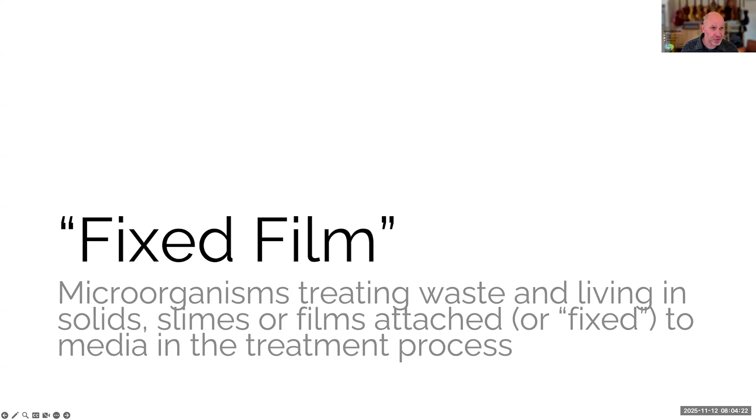Fixed film treatment is actually the oldest form of wastewater treatment that we have. It was basically first recognized around 1890 that aerobic organisms could actually treat wastewater by eating up the carbon in it, the biological oxygen demand. What we're basically doing is microfarming. We're farming bugs. It's a secondary biological treatment process.

So we've got primary separation and settling going on. This is often the next stage, so it's a secondary biological treatment process. Microfarming is one way to think about it, although micro ranching might actually be a little bit more appropriate, because what we're essentially doing is feeding organic material in the wastewater to the microorganisms while providing a home for them on the media. That home gives them access to oxygen from the air, food from the wastewater, and then those microorganisms basically eat that up, grow, and multiply.

...and in the process convert waste in the wastewater into new growth and carbon dioxide. And then, like any herding operation, we have to periodically cull the herd to maintain the growth of the biofilms at a desired level, because if we don't do that, they would essentially just fill up the basin as long as there's food.

There are two basic types of fixed film process that we're going to talk about today. The first is the trickling filter, which you see here. This is an older style one, typically relatively short, but it's designed for removal of biological oxygen demand. Depending on how the setup is done, it could also do nitrification.

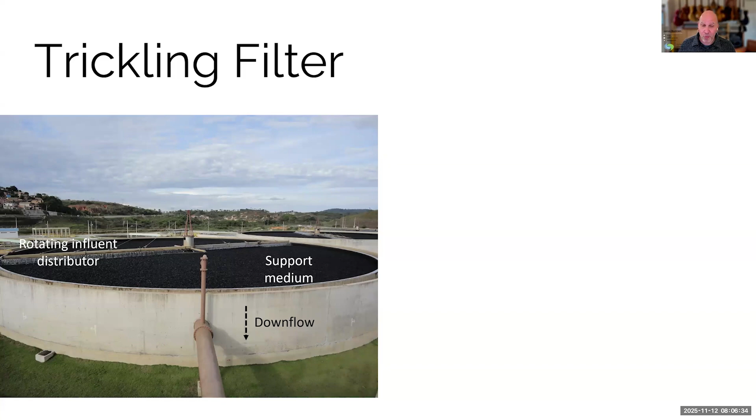The other form of fixed film process is what's called a rotating biological contactor, or RBC for short. It's doing the exact same biological process, and you're basically farming or ranching the exact same kind of microorganisms. It's just that the setup is different.

In a trickling filter, the media is still, it doesn't move. In a rotating biological contactor, the media, instead of being chunks, is these flat plastic plates, and they spin in the trough. Usually the bottom 40% or so is submerged. The microorganisms grow on the discs.

As you can see in this picture, the sort of gray film on there, that's the biofilm. They get exposed alternately to food and air by being rotated in and out of the basin at a very slow rate. Both of these operations usually work at around one rotation per minute, so they're fairly slow. But they both basically use the exact same process, the same bacteria. It's just a slightly different setup.

Trickling filters are the most common versions that we see in the US. So we'll start with those, because if you're going to be asked about these on an exam, you're more likely to be asked a question about a trickling filter than an RBC. But as we'll see, the same principles, the same formulas for determining operations apply to both.

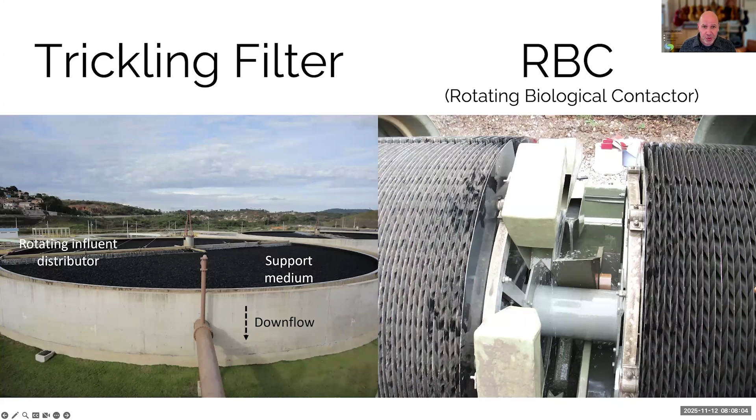So let's start with trickling filters, which are also sometimes referred to as biofilters or biotowers, depending on where you are. I want to point out that trickling filter is kind of a misnomer, because it implies that they're physically filtering the wastewater in the sense of straining materials out like a coffee filter, and that's not what's happening. They are removing unwanted organics from the wastewater, but using metabolic biological processes to do it, not actual physical filtration.

So kind of oddly named, but this was the original wastewater treatment form. It was the most common and widely used form of wastewater treatment in the first half of the 20th century. I found references going back to as early as 1908 in Reading, Pennsylvania. There was a 2 million gallon per day facility that was just a giant trickling filter. So they've been around for a really long time.

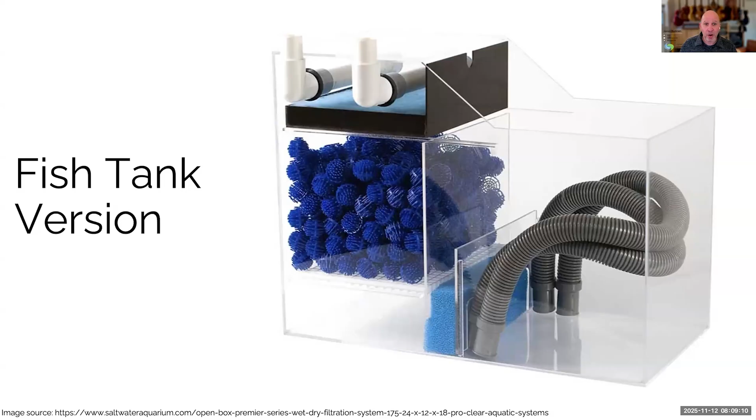They're relatively low maintenance, and you see them in a variety of applications too, not just in wastewater. If you've been to an aquarium or a pet store and looked at their setup, or if you happen to have a saltwater aquarium - I used to have a big 200-gallon one - they have trickling filters in them as well. This is what they look like. It's basically just a small scale version of what's going on at a wastewater treatment plant.

Water in this case is coming in through those white pipes at the top. It's being spread out over that light blue mat, trickles down over those bio balls. They're basically just plastic balls with a lot of surface area that promote air movement and provide a lot of surface area for the microorganisms to grow on, and they treat the water as part of their biological process. If you've been to a fish farm or a koi pond, you might have seen a larger one, something like this.

Exact same principle, just a slightly larger scale. Water's coming in through that pipe that is going across the top. There's media in there, in this case it's rocks, and the water trickles down. The microorganisms eat the BOD in the water and clean it as they go.

So they've been around for a really long time, been in use since the 1900s, and they continue to be a really good secondary treatment option in many cases, primarily because they're really easy to maintain. There's just not a lot to do here.

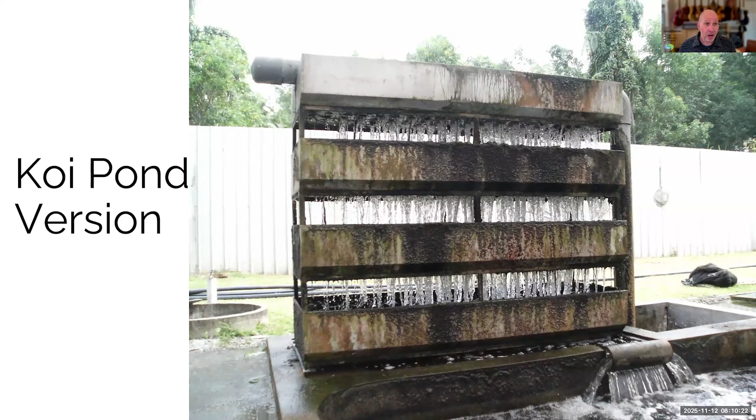As for what's going on inside, it's again a secondary biological process, and the biofilms in there typically have two kinds of bacteria. They've got aerobic bacteria, which use oxygen in the air like we do to breathe. And they have facultative bacteria as well, which can use dissolved oxygen out of the water or out of the air, but can also get oxygen chemically. So they can usually live in either aerobic, anoxic, or anaerobic conditions.

The kind of bacteria that you do not have in these are the anaerobic bacteria, and if those grow in there, they can cause problems. So what you're going to have here is aerobic and facultative bacteria, and they're generally designed just for BOD removal, or BOD removal and nitrification - in other words, turning ammonia into nitrates. Some filters can do both.

We'll look at some examples of how those can get set up. Sometimes you use two different filters, one to do the BOD removal and another to do the nitrification.

Part of the difference between the bacteria is that the bacteria that eat the BOD tend to grow relatively fast. So all things being equal, if there's a lot of BOD available, they'll just outcompete the nitrifying bacteria. So typically what you have happening is the bacteria eating or metabolizing the BOD are at the front half or top of the filter, taking most of the BOD out, so that the nitrifying bacteria have a much lower BOD concentration and can do their thing without being outcompeted. It really kind of depends on loading rates. We'll talk about those in a little bit.

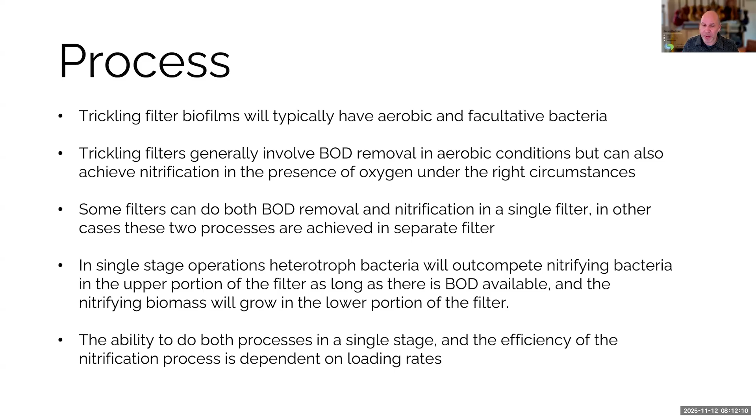Shortly after this was discovered, people started looking at other options, and activated sludge started to come into the fore. So these are sort of contemporaneous. As people did experiments, what they realized was, at least at the time, activated sludge typically had a smaller footprint, gave better effluent quality, and had a lower nuisance factor because things tended to be contained. So you didn't necessarily deal with as many smells and bugs that could happen with these large scale trickling filters, or trickling beds, as they were sometimes known.

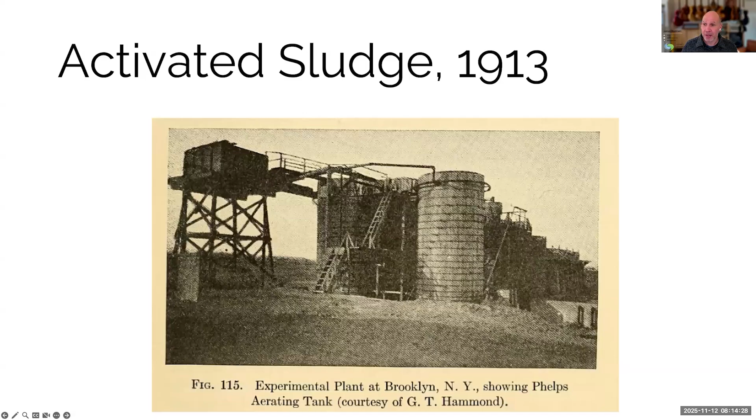And there are some places that actually use both activated sludge and trickling filters to do different things. The main difference between the two kinds of trickling systems that exist are the distribution systems.

The one I showed you from 1913 is basically one of these fixed nozzle distribution systems, where you've got an area or a giant tank, and the nozzles are set up like your sprinkler system. They are where they are, designed to spray an even pattern so you get even hydraulic loading. Downside is that they're kind of hard to maintain, and again, they take up a broad footprint.

More recent versions typically have rotary distribution, looking from the top down here. Instead of having a fixed pattern of pipes and nozzles, you've got a couple of arms that spin around and distribute the wastewater on top of the media that way. It's much more efficient, and it allows you to do things with controlling speed and things like that.

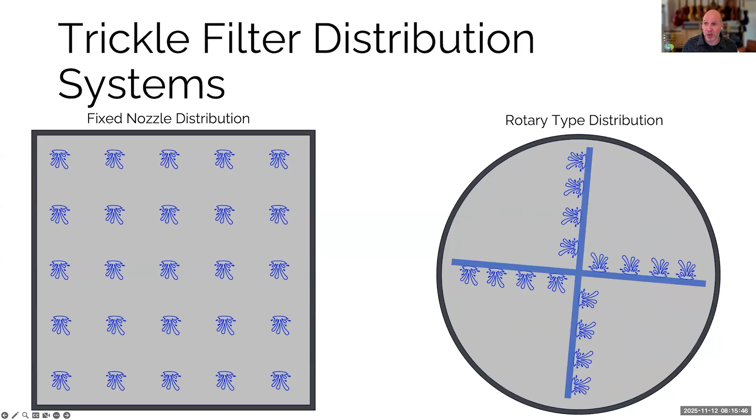So basically, with a fixed nozzle system, you're just relying on the design and placement to ensure even distribution, while with a rotary type, the arms' movement and the size of the orifices or holes in the arms that the effluent comes out of is what ensures the distribution. Two different ways of approaching it. The ones currently built pretty much all have rotary distribution setups. There's a little bit of information for home reading that gives you the basics of the differences.

The nice thing about the rotating arm option is they can work without a motor, because the pressure of the water being pushed through the holes in the arms is often enough to turn the arm itself. But they can also be motorized, so you can control the rotational speed, which, as we'll see, is kind of important. Either way, the goal is uniform loading over the entire tank for optimum efficiency. What you want to avoid is dry spots or dead spots. So again, the rotating arm version is typically what we see and mostly what we're going to cover today.

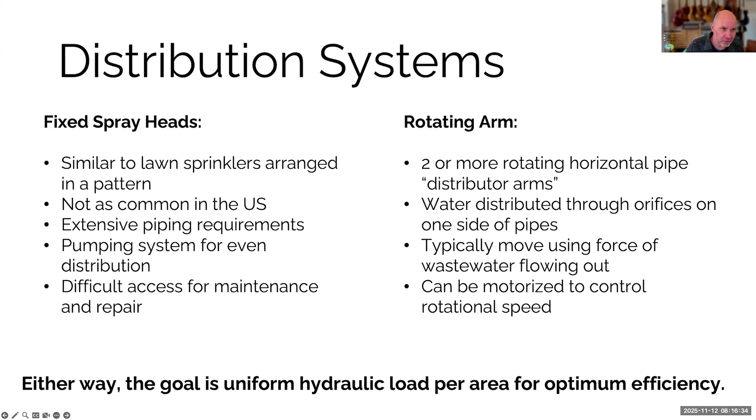Trickling filters have a couple of different setups. Some of the older ones typically look like this. They're relatively short, typically topping out at around 10 feet, because they were designed to have rock or slag as a medium. That's pretty heavy stuff, and once you start stacking loose rock up, you can only go so high without building enormous structures. So typically they'll be no more than about 10 feet high, with the medium inside no more than 5 to 7 feet tall.

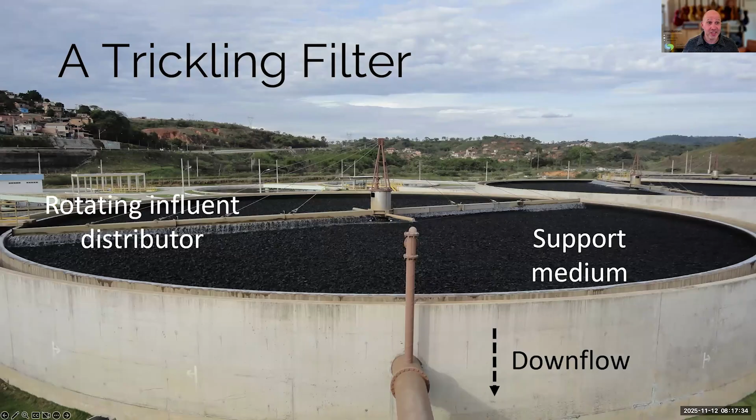This is relatively small — these things can actually be enormous. This is a picture from Stockton where they were building their new treatment plant, and you can see on the left-hand side a really, really big 4-arm trickling filter. If you look at the cars in the middle and on the right-hand side of the picture, it gives you an idea of scale. This thing is probably 40 or 50 feet tall and several hundred feet across, so it's really, really enormous.

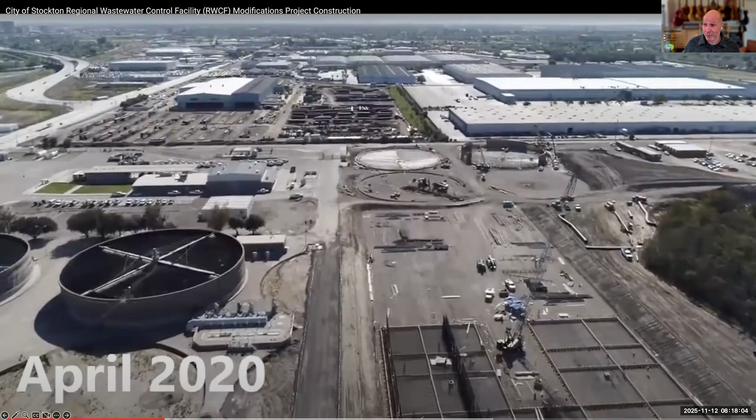And with the lighter plastic media, you can get both wider and taller. That being said, pretty much no matter how you build it, their cross section looks more or less the same — the main difference is the height. You've got a sprinkler arm going around the top, a feed pipe that typically pushes effluent up through the middle, and the filter media sitting in a basin lifted up off the ground with a support. Underneath, you've got a collection system with a drain. So these are the 4 basic components that are basic to all trickling filters.

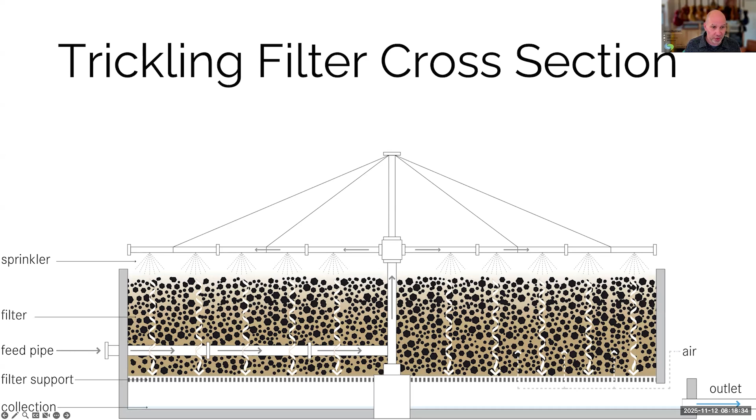You have to have void space for the air to move through, for the biofilm to live, and for the water to trickle down. The downsides of rock are that it's really, really heavy, so it's hard to maintain. If you ever have to move it out of there, it becomes difficult. The void ratio, the amount of open space to closed space, is typically around 35 to 50%, so not a lot of open space. Because of that, it limits the area biofilm can grow on and it also limits the ventilation area.

As I pointed out, in the 50s people started playing around with plastics and came up with plastic media, which really changed the game. Two different kinds of synthetic media were developed. There's the random dump trickle filter media, which is what you saw in that fish example earlier. These are pieces of plastic designed to have lots of surface area and a lot of airspace, and they're typically designed to make the water splash around as it goes down so you get a little more dissolved oxygen.

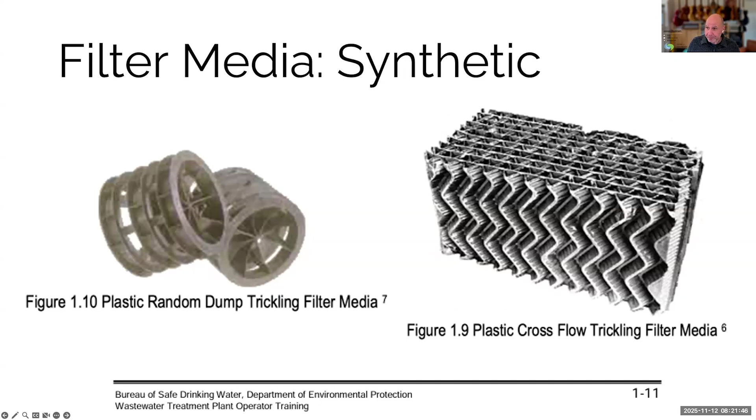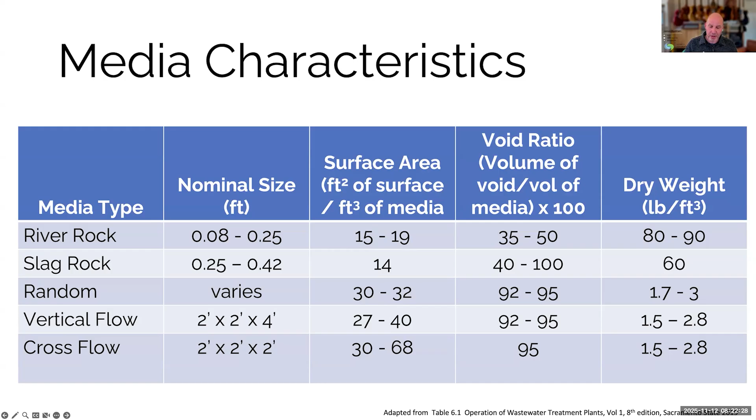You've got a much better void ratio, so it allows more liquid and more air to move through, and it's much lighter, so they're a lot easier to maintain or swap out if necessary.

You can often tell what kind of media is in a system just by looking at it. If it's short, 10 feet or less, it's probably got rock media in it, or was designed for rock media that's been retrofitted with random dump plastic media, which is basically just a bunch of small chunks that look the same. With vertical and cross flow media, it's self-supporting, so you can have very tall structures, 40 feet or more, and they're typically much lighter built. The short ones typically have brick or concrete sides because the rock is heavy and you need strong walls to hold it in. Whereas with the modern, taller designs, because the media is self-supporting, the sides are typically steel, fiberglass, or other relatively lightweight material, since they're basically just there to keep the bugs out, keep the liquid in, and hold everything in place.

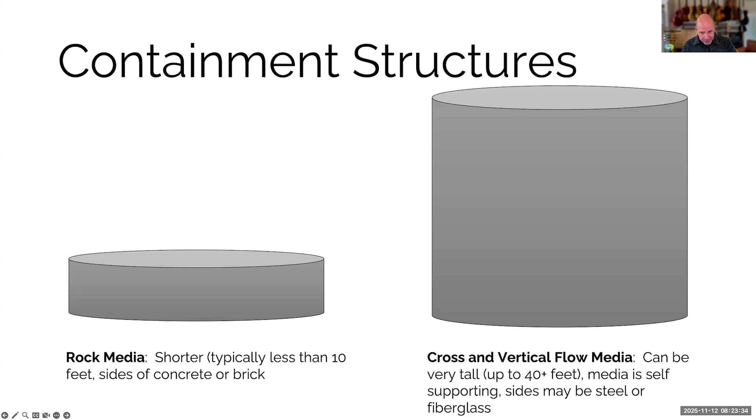They're not really there providing much support. So you've got a distribution system, you've got some kind of media, you've got a containment structure, and then underneath the containment structure, you have a drain where all of the treated water works its way out.

I do want to point out that, particularly in the larger systems, under drains sometimes have to be accessed. They can be very large. Remember, they are confined spaces. It is dangerous to work in them. So you want to make sure that you're following all of your safety SOPs, that you're following OSHA confined space rules, because the last thing you want to do is get hurt or trapped in one of these things while you're doing maintenance.

Now, I mentioned earlier that they have to have a lot of void space so that oxygen can move through the system, because, again, they are mostly aerobic bacteria that we're dealing with here. This is less of an issue closer to the equator, out in the islands, where there aren't really big temperature swings from season to season.

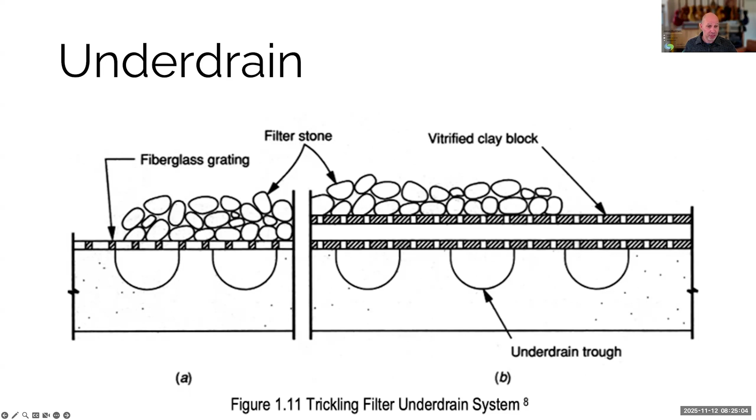But here on the continent and in higher latitudes, where there are big differences between summer and winter temperatures, you get some weird things happening with airflow. In the summer, typically the ambient air temperature is warmer than the effluent, so as air is moving into the tank, it gets cooled down and sinks. So typically in the summer, or in a warm climate, you're going to have top to bottom airflow, because the air is moving the same direction as the water, since it's getting cooler, getting denser, and sinking.

In the winter, we have the exact opposite going on. Typically, the ambient air is colder than the water, so air in the tank gets warmed up by the wastewater that moves through it and it rises. So you get this bottom to top flow pattern.

Now, of course, one of the advantages of these systems is that they can be very, very low tech, and you can just let nature run its course. A lot of systems are either retrofitted, and most of the newer systems are actually built with mechanical ventilation or blowers, so they can control the airflow. So that's what happens if you don't intervene. Obviously, if you've got mechanical air blowers, you can have the air go whatever direction you want, it just uses more energy.

So that's kind of an interesting phenomenon, and something to know, and that's the kind of thing that sometimes shows up on a test. So that's the main components and how they're built, and they're all variations on a theme. The key to running one of these is to understand the design specifications for your particular system.

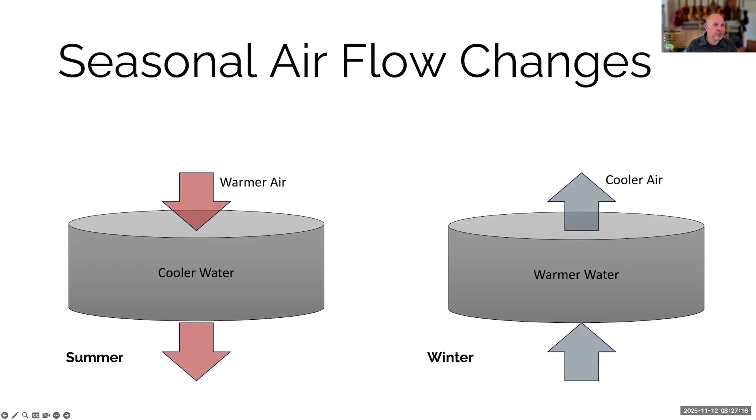So two key things that you have to keep track of are what are called the organic loading rate and the hydraulic loading rate. The first one, organic loading rate, is essentially how much food is moving through the system, and the hydraulic loading rate is how much water is moving through the system.

These are thought of separately, even though the food is in the water, and I'll explain that in just a second. But basically, with the organic loading rate, we're looking at how much organic matter, or BOD, is in the system relative to the media volume. So it's food to volume, pounds of BOD over thousands of cubic feet of media. And the hydraulic loading rate, however, is how much water is moving through the system in relation to the surface area. So one is a volumetric view, and the other is an area view.

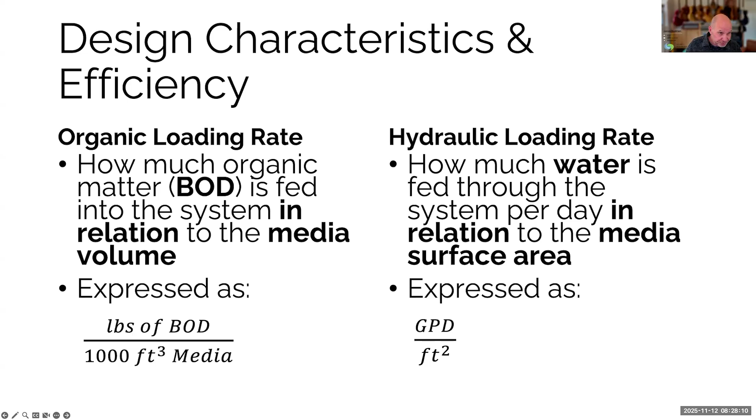So let's talk about the organic loading rate first. I'm going to start with a diagram to show you what you consider and what you don't. This is the typical setup. We've got the wastewater moving from left to right.

We should be taking a sample so that we know what our concentration is. We've got this primary effluent flow working its way through the media. Often there is recirculation flow, as there is in a lot of processes, where we're taking some of the treated water and feeding it back into the system.

So when we are looking at the organic loading rate, you typically ignore the recirculation flow. It does impact how much BOD is in the water, but not very much. So for typical operational calculations, you ignore those, and the only thing you're paying attention to is what's in blue here.

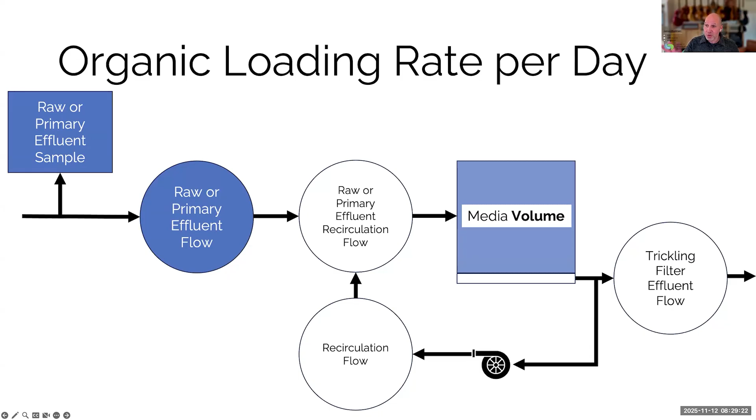The concentration, which you're going to get from your lab sample, the volumetric rate, which you're going to get either from doing some math or from a meter that's telling you how much is flowing through, and then your media volume, which is going to be constant. That's just something you'll figure out using your volume formulas depending on the size of your tank, and typically these are going to be round these days. So those are the three things you're going to consider.

This is basically what the formula looks like. It looks ridiculously complicated because we're using imperial and metric units. So we're using gallons per day, but we're also using kilograms and milligrams, and we have to do some conversion factors here. But it's pretty simple when you think about it.

Basically, it's the flow in gallons per day converted into liters times your BOD concentration, which is what you're going to get from that lab test, and then some conversions to turn kilograms into pounds, and then that over your volume. This is another version you might see where the two conversion factors are pulled together.

So in the top line you have the 3.785 and 2.205. You multiply those together, you get 8.34. So that's your organic loading rate. It's essentially how much food is in the water divided by volume.

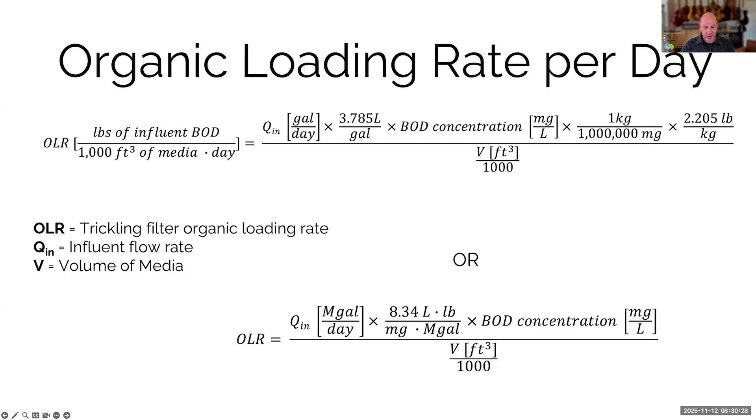The other thing you need to keep track of is the hydraulic loading rate. You need to know how much food they're getting, and you also need to know how much water is going through. The hydraulic loading rate, you actually do have to account for recirculation because recirculation is part of the water that's going through. So you're looking at the media surface area.

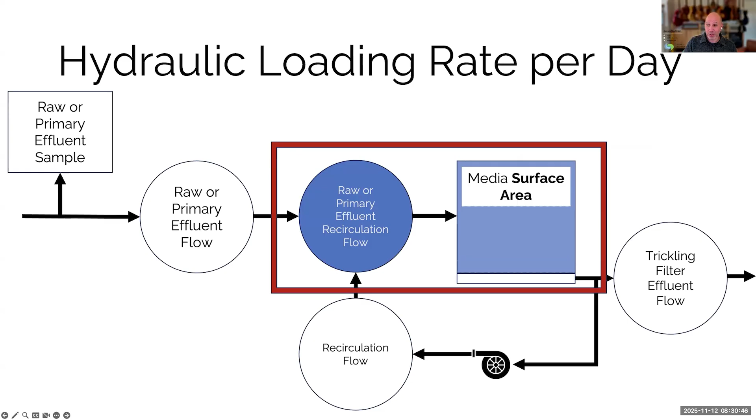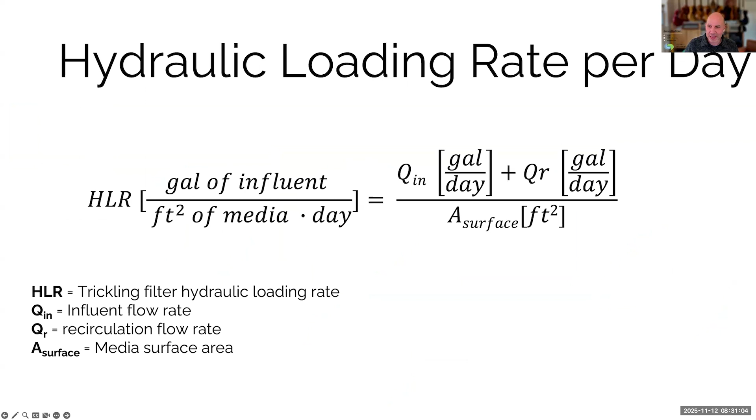You are adding together recirculation flow and your raw or primary effluent flow. It's a simpler calculation. It's basically the flow in gallons per day from your primary, and whatever you're recirculating, divided by the surface area. Pretty straightforward. I'll explain these in a second, what you use these for.

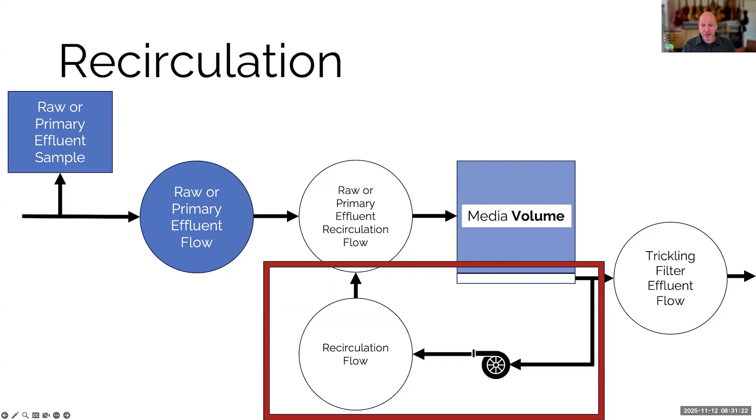Last piece, of course, is the recirculation, keeping track of how much of the treated water you're pushing back through the system. Recirculation is really a key component to operational variability here. It does a lot of things, and what it mainly does is decouple the organic loading from the hydraulic loading.

So the amount of food that's coming in is more or less constant, but by recirculating treated water, you can essentially change the volume of water that's moving through without impacting the amount of food that's moving through very much. You also use it for other operational procedures.

Like I said at the beginning, if you let the biological growth go unchecked, eventually the system would plug up. So you periodically have to rinse it out, which removes some of the biofilm. The recirculation is one of the ways that you do that. You produce hydraulic shear, basically forcing more water through the system to slough off some of those solids.

You can also use it to dilute the wastewater. If you had a random high load of BOD, you could adjust it. You can increase contact time. You can also use it to reseed the filter with microbes, just like you do in an activated sludge process, where some of the activated sludge goes back to the front to reseed the basin and prevent things from drying out.

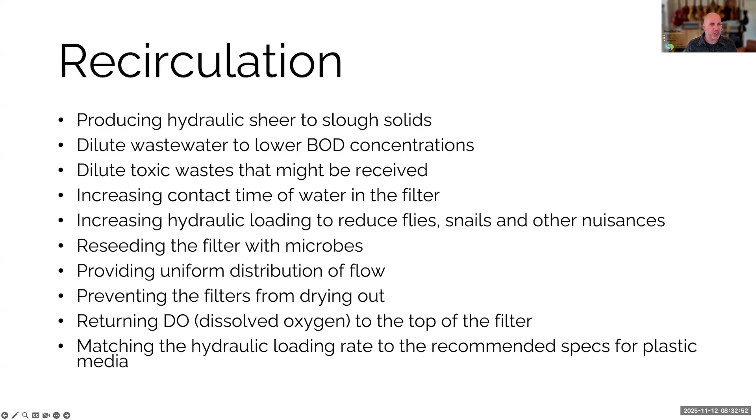And again, you use the recirculation values to make sure you're within the hydraulic loading rate specifications. Typically, a system is designed with a specific recirculation ratio or range of ratios in mind. Calculating that is relatively simple — it's just the recirculation flow rate divided by the inflow rate. For example, if you had 10 million gallons a day being recirculated and your primary influent was 5 million gallons a day, it'd be 10 million over 5 million, giving you a recirculation value of 2.

I'm not giving you a specific ideal number to aim for because it's very design specific. Any trickling filter is designed with a specific range of recirculation ratios, hydraulic loading rates, and BOD loading rates it can handle. The important thing is to know how to calculate them so you can determine whether you're within scope for your particular design. Don't get in the habit of thinking that because the recirculation rate at your plant is 2, it's 2 at all plants—that's not the case. You might end up somewhere with a different design that has a higher or lower recirculation ratio. So know how to calculate it, know what changing it does, and read the specs for your particular system.

The last main feature to think about is the dosing rate. In German, it's called the Spülkraft rate, and to me that actually makes more sense—I'm half German, and Spülen means flushing or rinsing. This is a very odd parameter, but basically it quantifies the intensity at which the influent and recirculation flow are being applied to the filter. You can think of it like the rate of fluid coming out of your shower head: a high pressure, high flow rate will rinse stuff off very quickly, but if you slow it to a dribble, you don't get as much rinsing of the soap off. It's the same principle in your basin.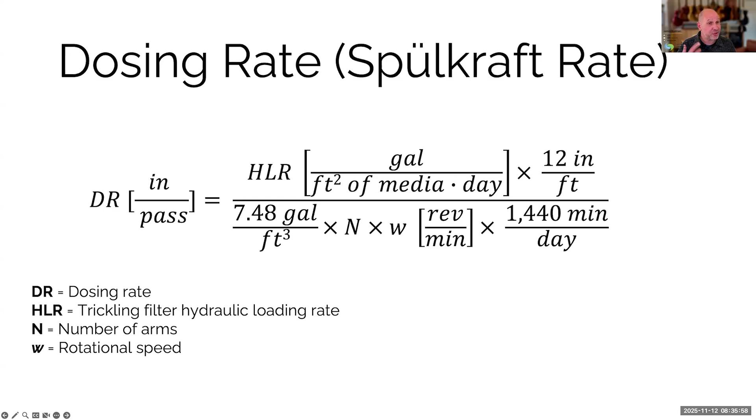Different systems are designed for different BOD load rates. For example, if you've got a very low BOD load rate under 25, the dosing rate would be somewhere in the 1 to 3 range. Then, if you wanted to flush that system—which you typically do once a day, sometimes more depending on the design—to get rid of excess biological growth, you'd run it up to the high end of the range to flush things off, with everything that got flushed out caught in the secondary clarifier. Then you'd slow everything back down, reduce the intensity, and the growth cycle would start again. So the higher the BOD rate, the faster the microbes grow, meaning you need a higher dosing rate and flushing rate to get rid of that additional growth.

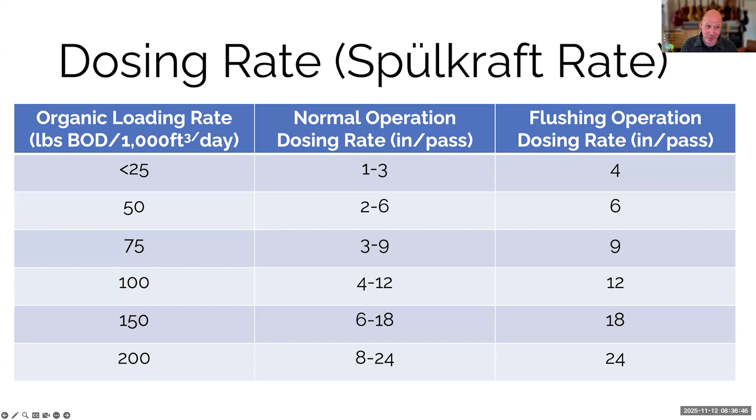Last but not least, removal efficiency—with all of our processes, we have to know how well they're working. This is the same formula you'll use for other operations in wastewater treatment. For BOD specifically, it's the concentration of BOD coming in minus the concentration of BOD going out, divided by the concentration going in, which tells us whether we're removing 50%, 80%, or 20% of the BOD—another important operational parameter. Different kinds of trickling filters are designed to have different removal efficiencies. The important thing is to know how to calculate it and what the removal efficiency for your system is supposed to be, so you can determine whether you're within scope.

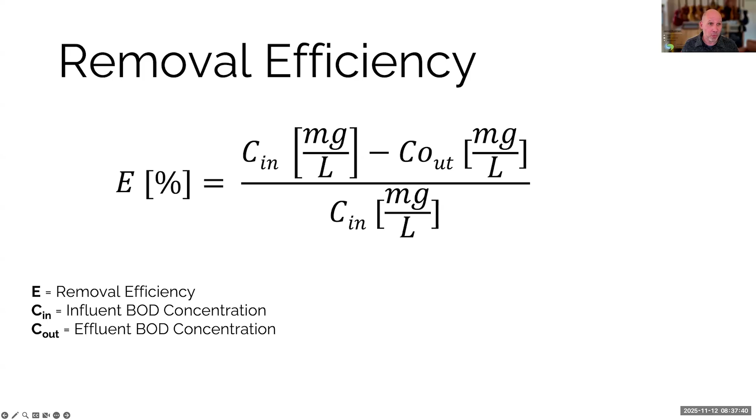There are a lot of different ways these can be set up. Sometimes they're set up just to do BOD removal, but they can also do BOD removal and nitrification.

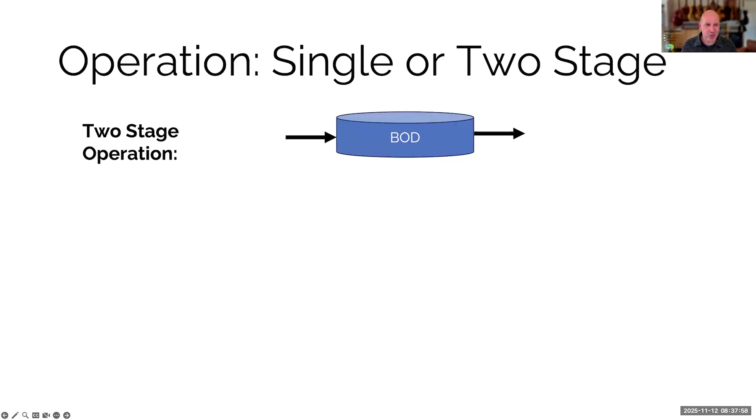There are two ways to do this: single stage or two-stage. A two-stage operation splits the two processes into two separate filters. The first handles BOD removal, producing very low BOD concentration effluent that moves on to the next stage, which is nitrification.

Sometimes it's better to do these in separate tanks because the carbon metabolizing bacteria grow very fast, whereas the nitrogen using bacteria tend to grow very slowly. So separating the processes into separate basins helps you run them better.

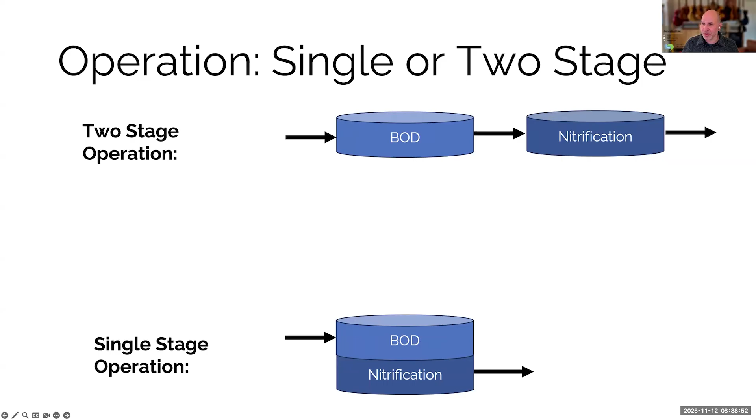A lot of modern systems, the very tall ones, are designed as single stage operations, and they're so big and efficient that the carbon-eating bacteria end up at the top of the tower while the nitrifying bacteria are at the bottom. So BOD removal happens in the upper reaches of the tank, and nitrification happens lower down. Single stage or two stage, it all depends on the design.

You can also have series or parallel operation, which you see in many wastewater processes. A series operation is like the first version I showed you, where things happen in sequence.

You've got primary effluent being treated, going into a tank that's getting rid of BOD, then into another tank that might remove remaining BOD or do nitrification, and then you move on to a secondary clarifier. So they're in series, one after the other.

You can also have parallel operations, and you'll see this more often with modern setups where an individual trickling filter can do both processes.

That would look something like this: primary effluent comes in, the stream is split, and it goes to two separate systems doing the same process, essentially next to each other.

Parallel operations are often nice for maintenance purposes and if you've got significant changes in flow, because you can take one system offline without having to bypass anything. If you took TF1 offline, you could just run everything through TF2 temporarily.

Whereas with a series operation, if you have to take one of those steps out, you essentially have to bypass it or figure out something else to do. So series, parallel, important things to remember in terms of how you're operating them.

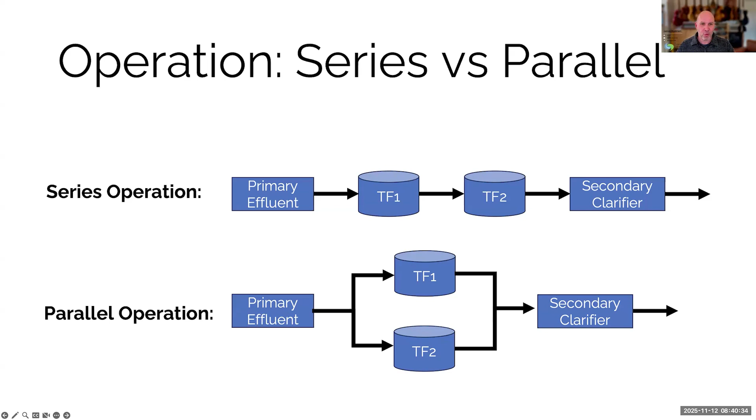There's also, as I mentioned, different designs for different BOD concentrations, and those are called filter classifications.

They're basically grouped or classified based on the BOD loading rates they're designed to handle, or in some cases whether they're just doing BOD removal, just doing nitrification, or both.

So low, intermediate, high, and roughing filters all refer to types of filters primarily designed for BOD removal, and that classification is based on the organic loading rate.

Then you have nitrifying filters, which are designated as either BOD plus nitrification or nitrification only. Again, it all depends on how they're set up.

There are some design differences I want to go through. I don't think you need to memorize these things, but it's good to understand the differences between the classifications and what they're designed to do.

I've got a couple of series of tables here comparing plastic media to rock media, just to show you what the differences are.

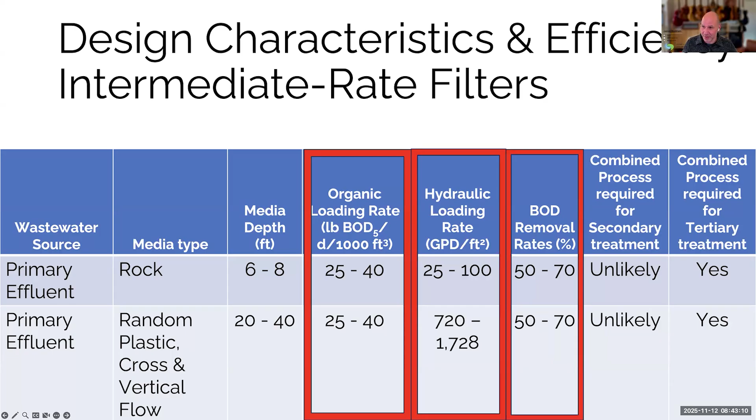Intermediate filters are in that range of 25 to 40 pounds of BOD per day per thousand cubic feet. But as you increase the BOD rate, you also get lower removal rates. You've got much higher loading rates with plastic media, but no matter which version you're using, if you've got a higher organic loading rate, you're typically going to have a lower BOD removal rate. That's the inference you need to understand: higher BOD rates typically mean, at least with a trickling filter, lower removal rates.

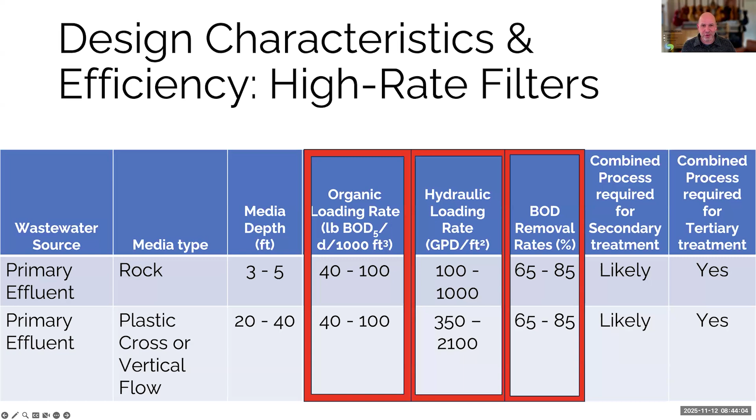Then there's something called a roughing filter, designed to handle extreme BOD loading rates, 100 to 300 pounds - triple what a high rate filter could handle. And as the relationship continues: much higher BOD loading rate, much lower BOD removal rate. So that's the relationship to remember - high BOD, low removal rate; low BOD, typically high removal rate.

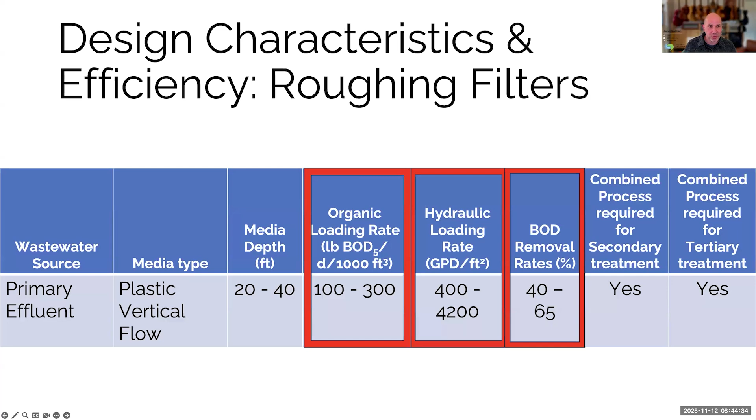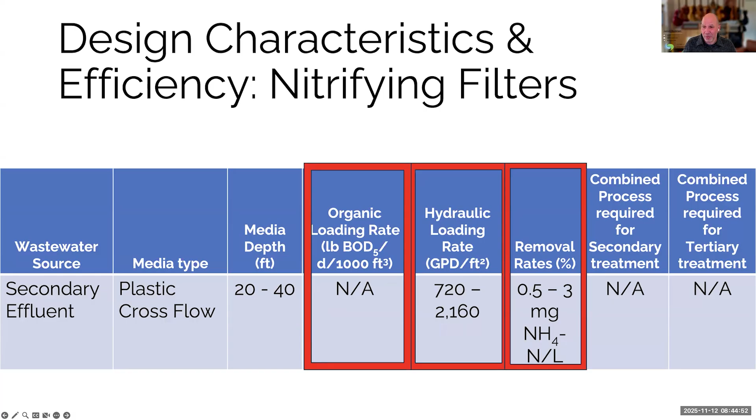Then of course there are nitrifying filters as well, which typically use secondary effluent as their source. There's no real BOD removal going on in these processes - what's happening is removal of nitrogen, turning it into nitrates. Those percentages are usually pretty good; you can get down to rates of 0.5 milligrams per liter. This table shows the nitrification process from a percentage standpoint. You need relatively low BOD loading rates to get decent nitrification, but you can get up to 95% removal rates with nitrification.

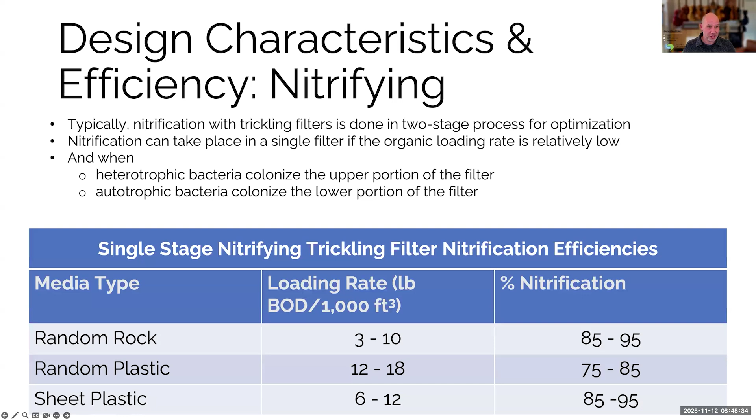So all of these things, a lot of different parameters to keep track of. All of these really depend on knowing the BOD concentration of your influent. You really cannot adjust these things if you're not doing routine sampling and knowing the typical strength of what's coming into your system. So like everything else, key to all good operations is a good sampling plan. You want to know what's going in and what's coming out, so you can control your processes. Part of becoming a certified operator is learning how to tweak those processes so you can affect the outcome depending on what's coming in.

Obviously, not all of these parameters apply to trickling filters. Chlorine residuals don't come into play yet - you're well before the disinfection stage - but this table lets you know typically what you're going to be looking at and where you're going to be doing those samples.

For BOD5, typically you're going to be sampling the primary effluent going into your trickling filter so you know where it's at. Typical ranges for that primary effluent are in the 100 to 380 milligrams per liter range. The range you typically deal with is going to inform how you run your system and which kind of filter you have - low rate, intermediate rate, high rate, or roughing filter, or maybe a couple of those in series. You might start out with a roughing filter and then have an intermediate rate filter after that, because the roughing filter has gotten rid of most of the BOD for you.

So you've got to understand the operational parameters, but like all things, sampling is really key. You want to make sure you're sampling often enough to catch changes and adjust your operations. Different kinds of changes imply that different things are going on in your system. For example, if you have high TSS concentrations in the output of your trickling filter, that might indicate there's heavy sloughing going on.

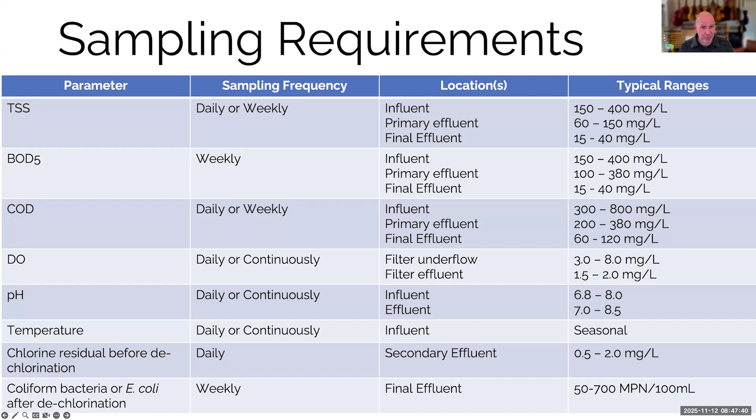There's a lot of biomass sloughing off, maybe more than you actually want. But if you get rid of too much of it, if you rinse too much of the biofilm out, the treatment process slows down. That's the kind of relationship that over time you will learn.

So let's talk about a few of the things that you might run into. Odor is always an issue. Like I mentioned with the big open field versions, that was one of the main objections—when things went south, you'd have these large fields full of stinky effluent, potentially flies, snails, and other things if they weren't maintained right.

So if you have a trickle filter and you are noticing smells from it, there's a couple of things that could be going on. There are several things going on.

You could have septic influent coming in, so the problem might not actually be the filter itself. It might be processes upstream that aren't doing what they're supposed to, or maybe you had a blockage that took a long time to clear in the collection system and nobody at the plant was warned, and you suddenly had this massive load of septic sewage come in. That's obviously going to have a negative effect on all the processes downstream if you haven't accounted for those.

You might have poor filter ventilation. Maybe you're designed to have a mechanical blower system and the blowers have stopped working, or you've let the biomass accumulate to the point where there's just not enough room for air to move through and things are starting to go anaerobic. Excessive organic loading is the same sort of thing—you've let biological overgrowth happen, it's filled up the pore spaces, and now you're not getting airflow.

Similarly, you might have dry zones. If the sprayer arms get plugged and you don't see it, you'll have areas where the bacteria basically die off because they're not getting any food or any water, which can create first anaerobic conditions and then dead zones.

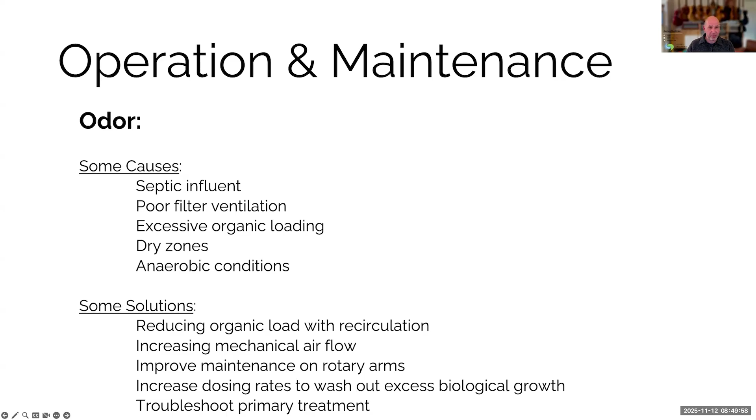You might actually have to troubleshoot your primary treatment because, again, just because the problem is manifesting itself in your secondary treatment does not necessarily mean that's where the cause of the problem is. It could be something upstream. So smells are something you might run across if maintenance hasn't been done the way it's supposed to.

The other things you might see on these are ponding—where instead of the water trickling through the filter, it's just sort of forming ponds on top. This is typically caused by excessive organic loading, which leads to excessive growth.

So maybe you've got a low range rate filter, and it's designed for less than 25 pounds of BOD per day per 1,000 cubic feet, and for whatever reason suddenly you've got a much higher BOD rate, which has caused the microbes to sort of explode in growth and plug up all the holes, resulting in ponding.

This can happen because there's uneven distribution—again, if the arms are plugged or the distribution orifices are plugged. It could happen if you've got an open top filter and there's just debris that's accumulated on top.

Here in Albuquerque, they have some of these, and they've actually got domes over them—you'll see some of the later pictures where they have domes over them so that they can stop things like leaves falling. This can be an issue in the fall around here. We have all these Siberian elms; they all drop their leaves at the same time, and if they're anywhere near a plant, they could all end up sitting on top of your media and plugging things up, leading to filter ponding and all the negatives associated with that.

Like I said, if you're not flushing, in addition to the microbes growing, you can end up with insects, snails, moss, and algae in there as well. All of this basically results in insufficient void space, which then causes the system to break down. So there are a lot of things you can do depending on what your particular situation is.

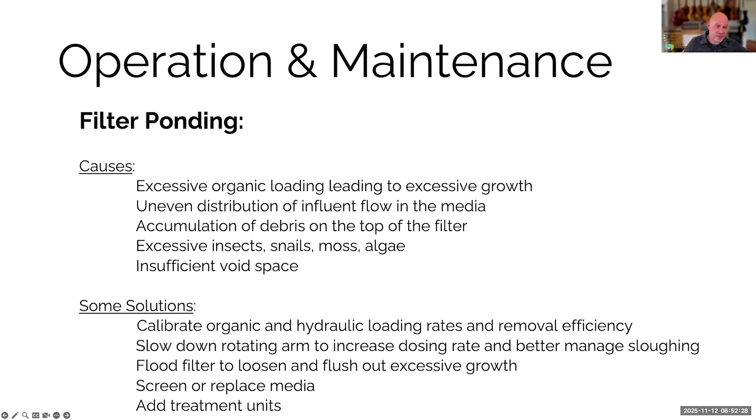Again, calibrating those hydraulic loading rates, those organic loading rates, checking your removal efficiency, making changes, slowing down the rotator arm to increase the dosing rate. Same amount of fluids going out, but it's covering less area, so it increases the intensity and flushes more off. Sometimes you actually have to flood the entire basin and then drain it to flush out that excessive growth. Or you might replace media. A lot of older systems that had rock in them are eventually replaced by plastic media. If things get really out of hand, it may be more cost effective to just replace the media than try to do other things. Or you might just need a new treatment unit, an additional unit in series or in parallel to handle the operations.

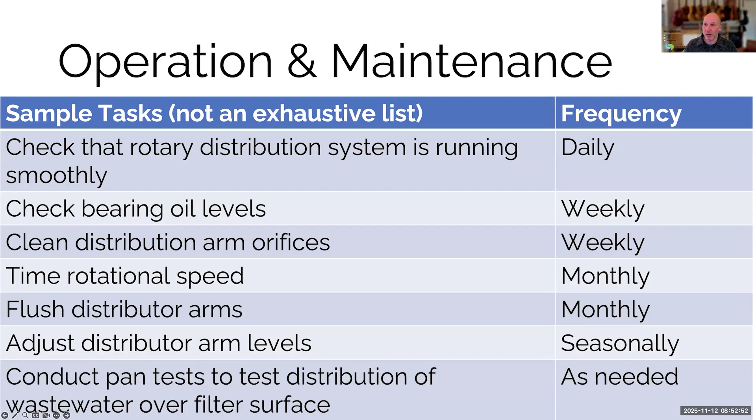So a lot of operations and maintenance. This is a non-exhaustive list. I did mention that they're low tech, but they are not no tech. And like everything, they do need attention, so you have to make sure that they're operating correctly. This is a non-exhaustive list, but some of the main things that you need to focus on, and the frequency that you would want to look at those as well. I'll let you read those later.

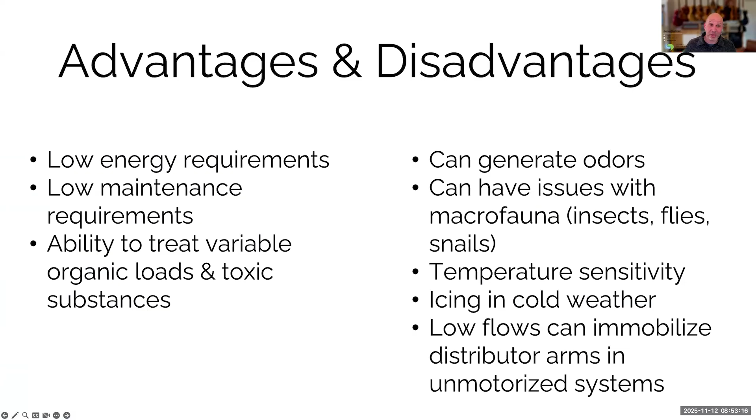So advantages and disadvantages: low energy requirements, typically low maintenance requirements, although not no maintenance. And they can typically treat pretty variable organic loads. That being said, if they're not maintained, they can generate odors. They are sensitive to temperature, particularly if you don't have a mechanical ventilation system. And if you're in a place that has really, really cold weather, the whole system could potentially freeze up.

So with that, we got a few poll questions. I think we'll just do the first two here, Valeria, and then we'll do a short session on rotating biological contactors.

What kind of process is it? Is it a preliminary process? Is it a primary process? Or is it a secondary process? We'll give you 30 seconds or so to answer this. If you're in a group, come to a consensus and throw in a vote. All right, looks like we got about half of our folks voting. I'll give you another 20 seconds. Like the exam, if you're not sure, guess. You got a 33% chance of getting it right. All right, going once, going twice. Go ahead and end the poll and show the results for us.

Right, it's a secondary process. So it's a biological process. Preliminary treatment is typically a physical process, we're straining things out—that's what's going on at the headworks. Your primary treatments are typically those settlement tanks that are at the beginning of the process, where you're letting a lot of the solids sink out of the system before you go and treat it. And then secondary processes are biological treatment, and that's what this is.

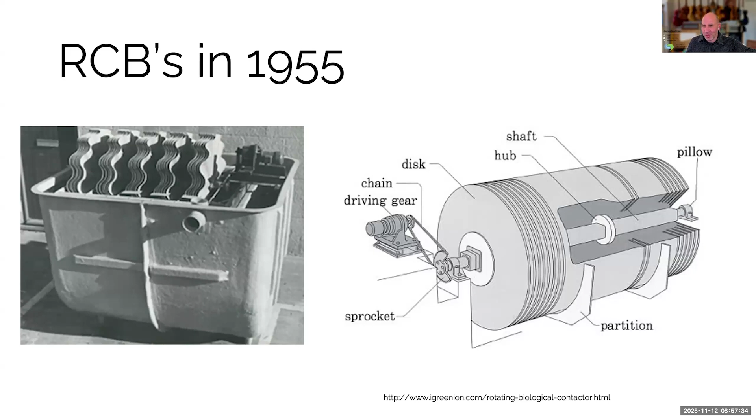And like I said at the beginning, it's the same process with a slightly different setup. Instead of the media being stationary and the water flowing through it, in this case, you've got a basin that the media is rotating in. This is kind of what some of the earlier versions look like. You've basically got a motor that spins this, and you've got a bunch of discs. So instead of plastic media or round media or rocks, you've got these flat discs that the biofilm grows on. They're stacked along a shaft, and that shaft is semi-submerged in the water like this.

You've got a side view schematic and a front view. Typically 35 to 40% of it is submerged, and basically you're alternating food and air by rotating these pieces around.

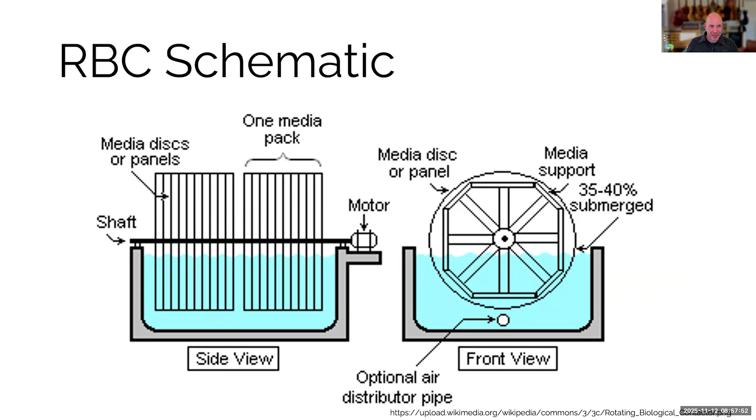The processes are basically exactly the same, and the setups are very similar to what you might see with trickling filters. They could be run in parallel like these setups, or they could be run in series. This example is actually both, because you've got multiple shafts in series, but then two separate trains. This also shows you where a trickling filter or an RBC typically sits in the overall process: after primary clarification, before secondary clarification and chlorine contact.

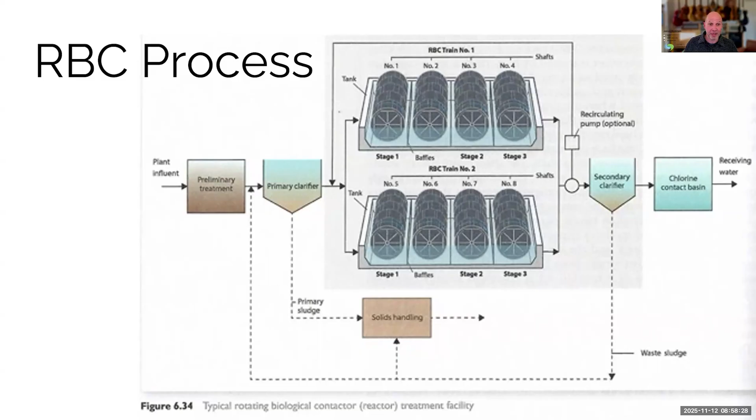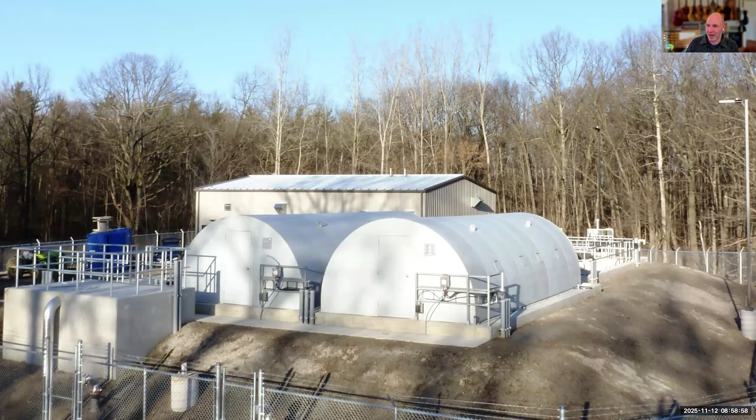This is what they typically look like. This one is up in the central north of the United States. You can see they're covered, which helps mitigate some of the issues you get with weather changes. Also notice there's a ton of leaves and trees back there, which probably produce a lot of leaves in the fall.

Basic characteristics of these: there are two classifications, basically standard density and high density, looking at surface area per shaft. With standard density, you're looking at about 110,000 square feet of area or less per shaft, and those are typically used for BOD removal. The high density ones, with a lot more square footage per shaft, are typically used for nitrification.

Again, these could be in series or in parallel. I want to point out that bottom line, which shows you, in an operational shaft, how much of the weight is actually the biofilm. One of those shafts is significantly lighter when you put it in than after it's been operating for a while, because 80% of the weight could actually be biofilm.

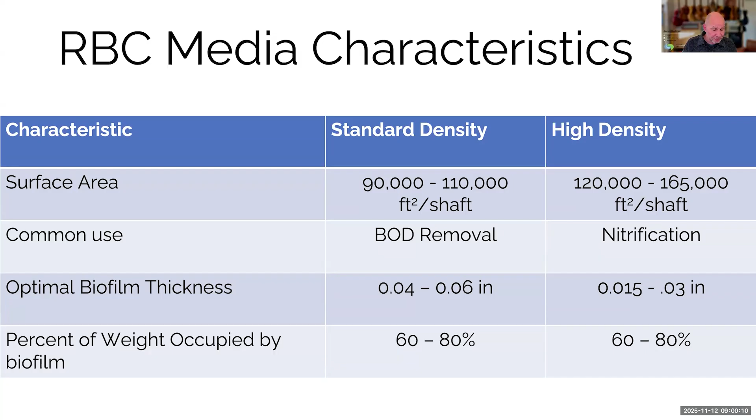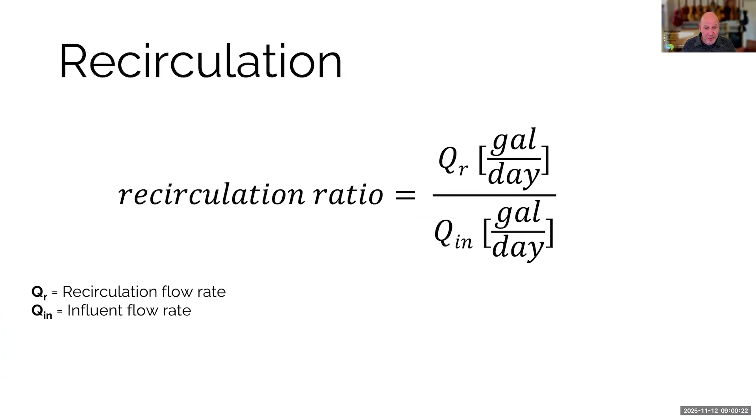That being said, it's the same kind of processes and exactly the same parameters you would use to calculate whether you're in the appropriate operational range. You look at organic loading rates, hydraulic loading rates, removal efficiency, and recirculation. Same things.

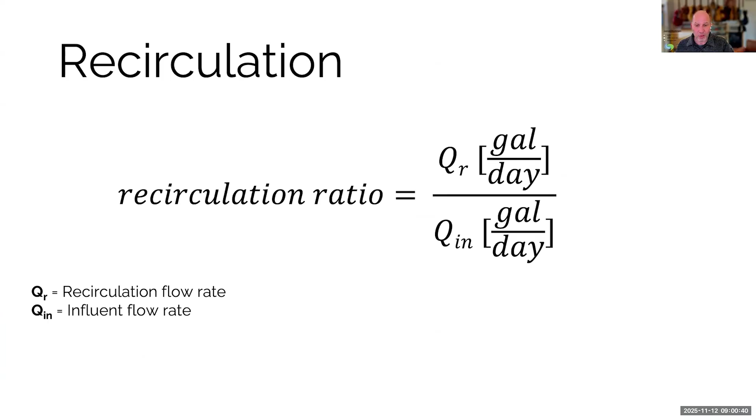Again, your range is going to vary depending on the design. The important thing is to understand how to calculate these, and then know where to find the specs for your particular system. You should have an operations manual that says, if you've got one of these, what range it's supposed to be working at.

The nice thing about this is you can get ammonia nitrogen values reduced to less than 1 milligram per liter, so they're very, very efficient. But the main thing about these, and the big difference between these and trickling filters, is you cannot put high BOD loads through an RBC.

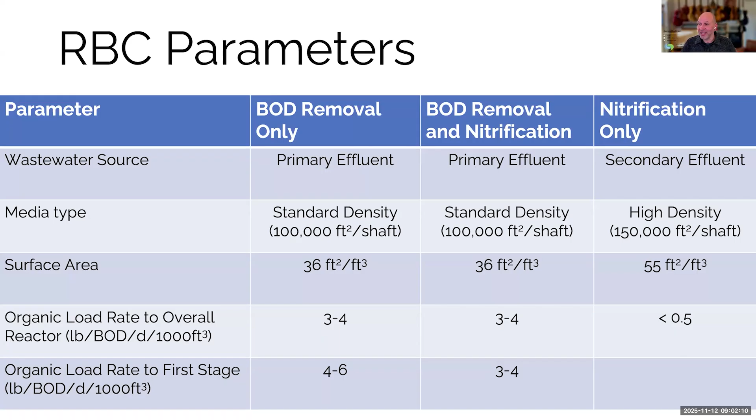Because they just don't work for those other kinds of things, you're not very likely to see one of these typically in the United States. They're just not that popular here, much more used in Europe and other places, and again the design is for just a whole different scale of BOD concentrations.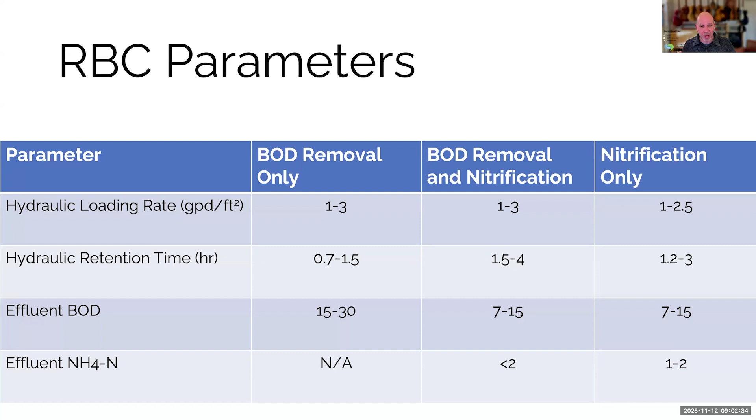Same process, but designed for different circumstances. Like the other ones, you can operate them in single trains, multiple trains, parallel, or in series. One of the unusual things is you can actually design these to have the flow running parallel to the shaft or perpendicular to the shaft.

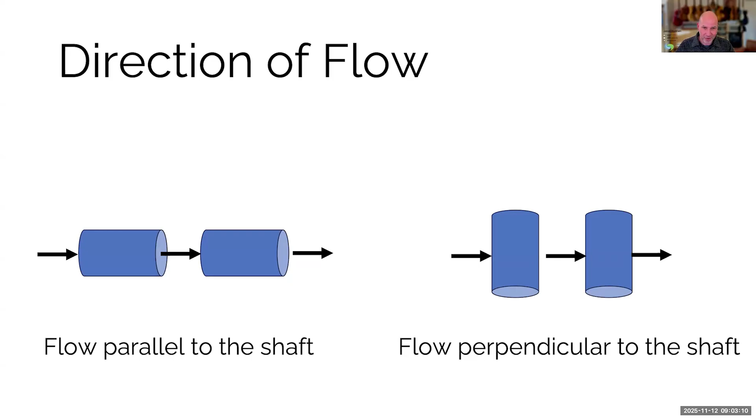Again, it's going to be designed based on the quality of wastewater it's trying to deal with. The one major difference is that if you've got the drums perpendicular, the initial load of BOD coming into the system gets distributed to more biomass because it hits them all edge on, running through the filter as opposed to running around it. They can be run in a couple of different stages.

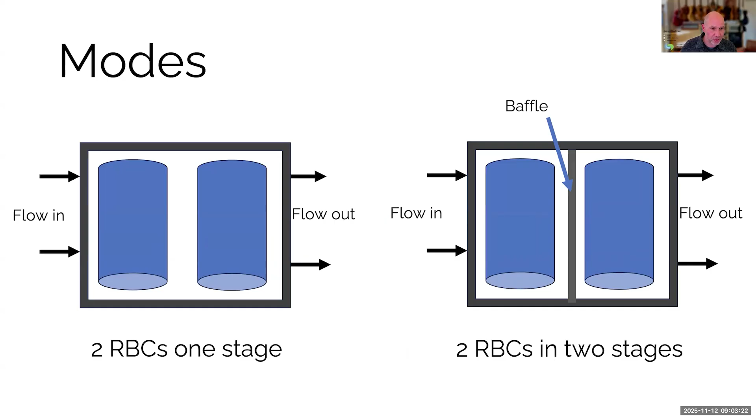You can put baffles in them to get different kinds of treatment going on. They've got some limitations, like I said, lower organic loading rates, not as flexible. They're set up for very narrow ranges of BOD removal, slow and steady with not a lot of variation. And obviously, these cannot be used as roughing filters, they would just be completely overwhelmed.

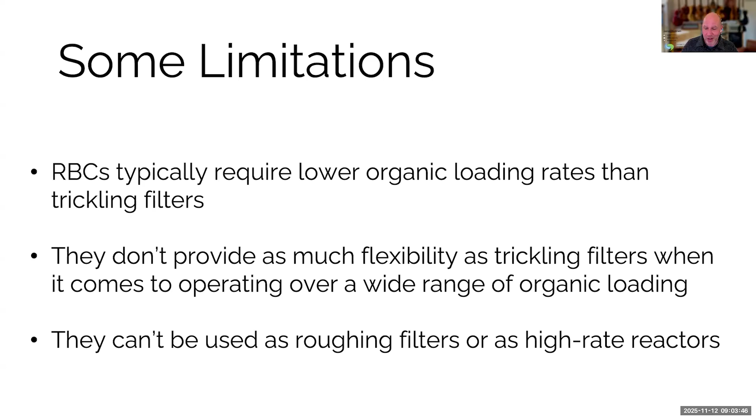So a very similar process going on, just different parameters that you're dealing with. The O&M is very similar to what you're looking at with a trickling filter, with the added complication that you need motors to run an RBC. So you have to look at things like bearings, shafts, greasing main shafts, and things like that. Non-exhaustive list, but a list of things you're typically expected to know, including how often you might have to look at these things.